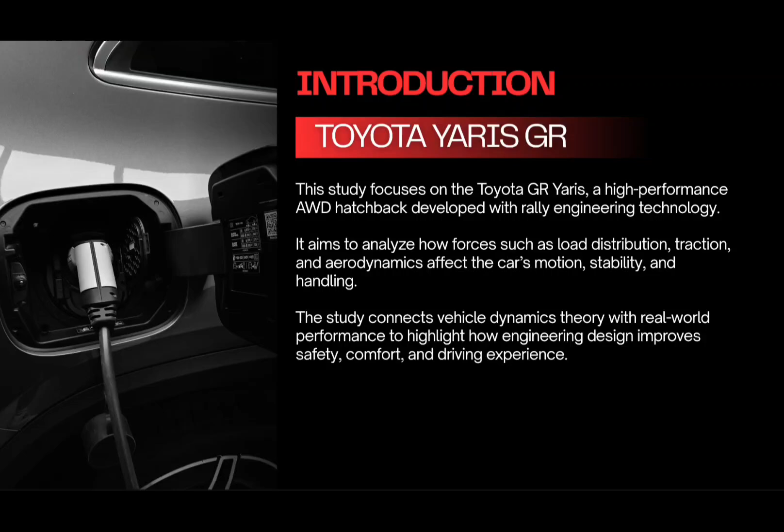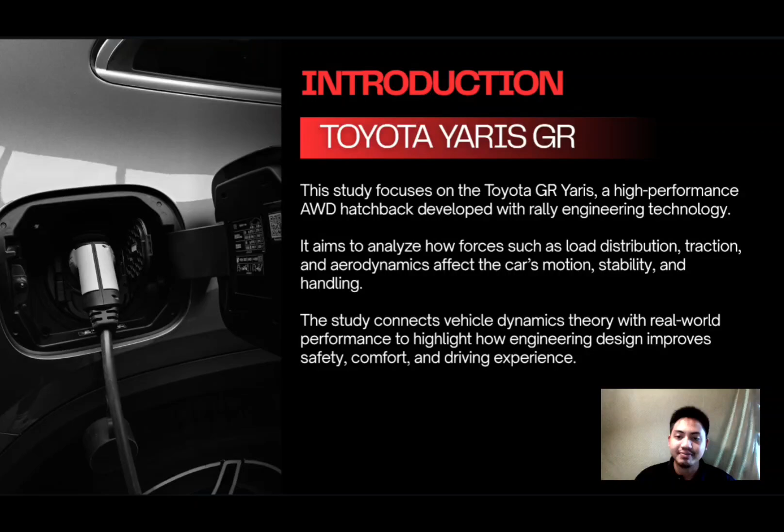For the Toyota GR Yaris, this study focuses on a high-performance all-wheel drive hatchback developed with rally engineering technology. It aims to analyze how forces, such as load distribution, traction, and aerodynamic effects, affect the car's motion, stability, and handling. The study connects vehicle dynamics theory with real-world performance to highlight how engineering design improves safety, comfort, and driving experience.

For discussion, during acceleration on a 4% uphill road, the rear axle carried more load due to weight transfer, while the front axle load slightly decreased. This improved traction at the rear axle, especially in the all-wheel drive Toyota GR Yaris, giving better grip and stability. AWD systems help maintain traction control and strong tractive force in lower gear. Aerodynamic body design reduces air drag and improves fuel efficiency. The GR Yaris uses a stiff suspension setup for better steering handling, but not for comfort. Also, Ackermann steering geometry indicates stable cornering with minimal understeer.

Overall, the Toyota GR Yaris shows a good balance of power, handling and stability, proving its design is well optimized for performance and control.

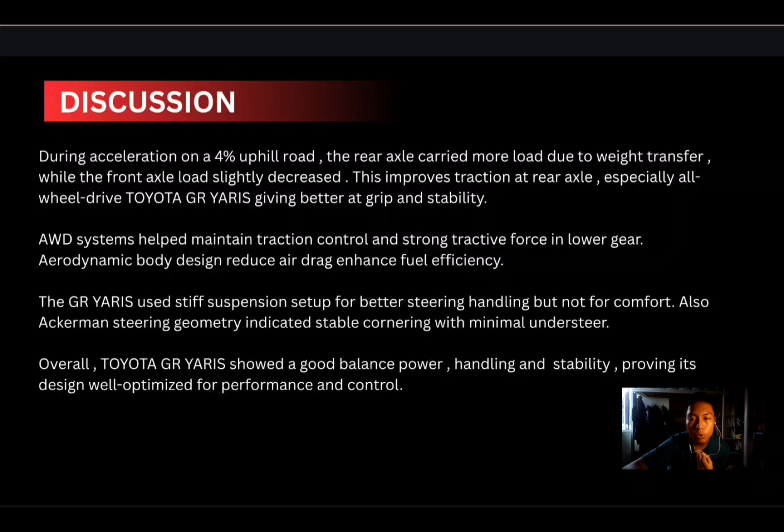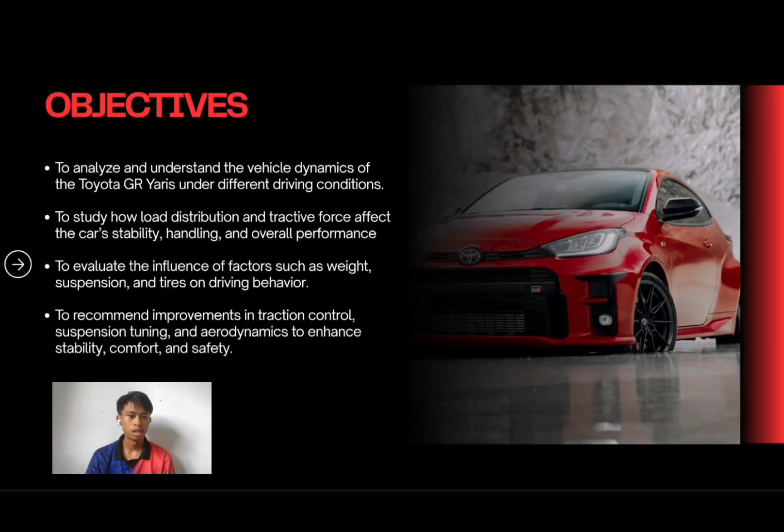For the objectives, the first one is to understand the vehicle dynamics of the Toyota GR Yaris under different driving conditions. The second one is to study how load distribution and tractive force affect the car's stability, handling, and overall performance. Third, to evaluate the influence of factors such as weight, suspension, and tire on driving behavior. And the last one, to recommend improvements in traction control, suspension tuning, and aerodynamics to enhance stability, comfort, and safety.

Okay, for the first question, we need to figure out the load distribution on the axles when the vehicle accelerates from a standing start on a 4% uphill road at 3.7 meters per second squared, assuming the CG height is 0.5 meter. For the calculation, change the weight from kg to newton by multiplying it with g, that is 9.81. For the front axle ratio and rear axle ratio, it is 59% to 41%.

Move on to how to get the front axle weight. Overall, 59% multiplied by the weight of the vehicle, that is 16,137.45 Newton, and the answer is 9,521.1 Newton for the weight of the front axle. For the rear axle, 41% multiplied by 16,137.45 Newton, and the answer is 6,616.35 Newton. That is the weight for the rear axle.

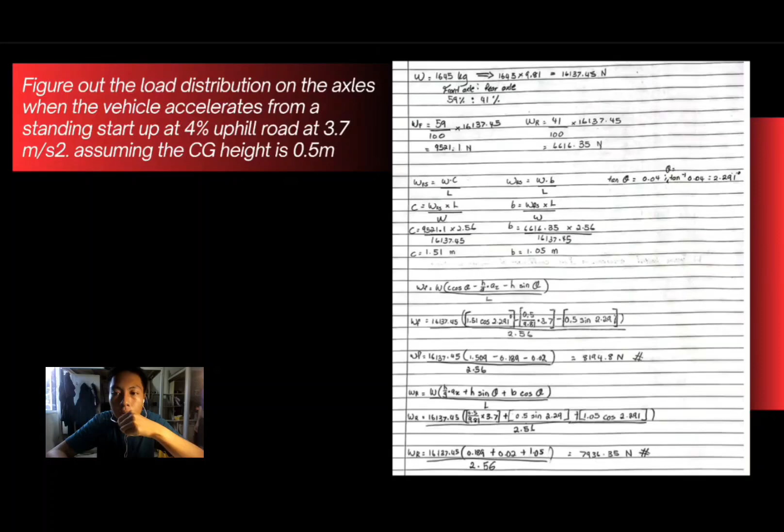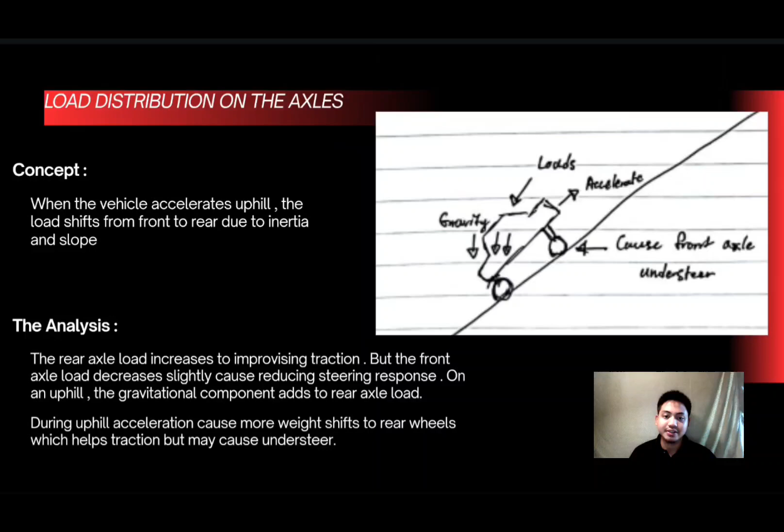For the load distribution on the axles, the concept is that when the vehicle accelerates uphill, the load shifts from front to rear due to inertia and slope. The analysis shows the rear axle load increases to improve traction, but the front axle load decreases slightly, reducing steering response on an uphill. The gravitational component adds to the rear axle load. It also causes more weight shift to the rear wheels during uphill acceleration, which helps traction but may cause understeer.

Okay, for the next question, determine the vehicle. Question A: first until fourth gear tractive force. Okay, now we start from calculation first. First of all, we use this formula to get first until fourth gear tractive force.

And now the question from the brochure already provides the TE number, that is 400. So we put it inside the formula. For first gear, we put 400 multiplied by 3.538, multiply 3.9, then multiply 0.9, and all of that divided by 0.317. The final result for first gear is 15,669.88 Newton.

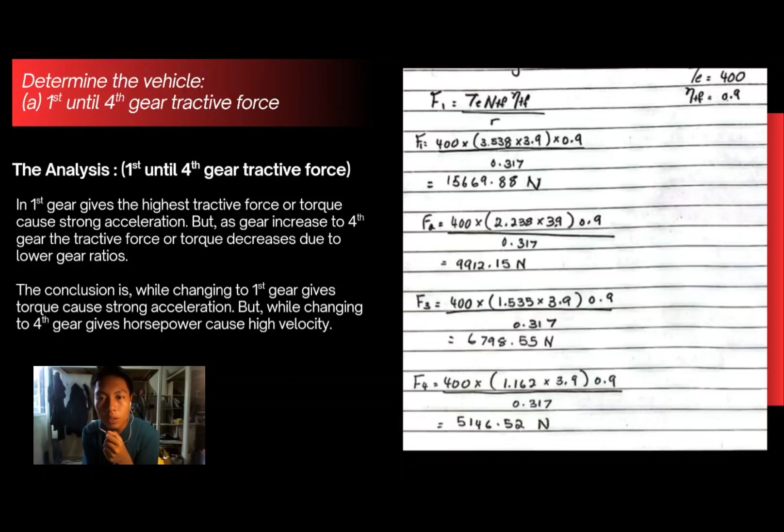Okay, for the analysis from first until fourth gear tractive force, first gear gives the highest tractive force or torque, for strong acceleration, but as gear increases to fourth gear, the tractive force or torque decreases due to lower gear ratios. The conclusion is that changing to first gear gives torque that causes strong acceleration, while changing to fourth gear gives horsepower that causes high velocity.

Okay, for the next question B, the threshold limit acceleration if the coefficient of friction is 0.62. Now we're going to the calculation first. For WF is 9,521.1 Newton. The CG is 0.5 meter and L is 2.56 meter. Now we're going to use the Fx max formula: 0.62 multiplied by 9,521.1, divided by 1 plus in bracket 0.52 multiplied by 0.62 divided by 2.56, and the final answer is

5,242.81 Newton. Okay, to get the acceleration, we're going to use Fx max equals m multiplied by acceleration. So we need to move m so Fx max is divided by m. So we calculate or find the answer for acceleration, that is Ax. Ax equals 5,242.81 divided by 1,645. So the final answer is 3.19 meter per second square.

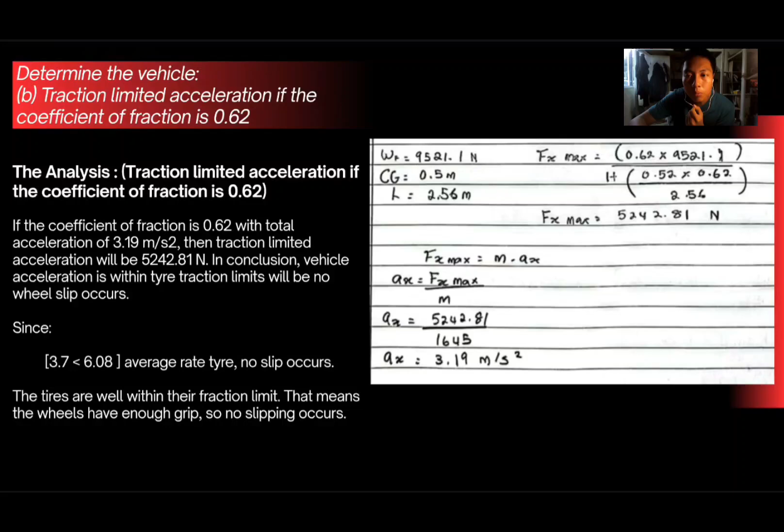Well, there are modifications to reduce aerodynamic drag and increase fuel economy, such as front bumper spoilers. Aerodynamic surface extending downward from the bumper to block and redirect the shear flow that impacts on the underbody components. It will contribute to drag and it also significantly reduces underbody drag. Low air drag means increased vehicle fuel economy.

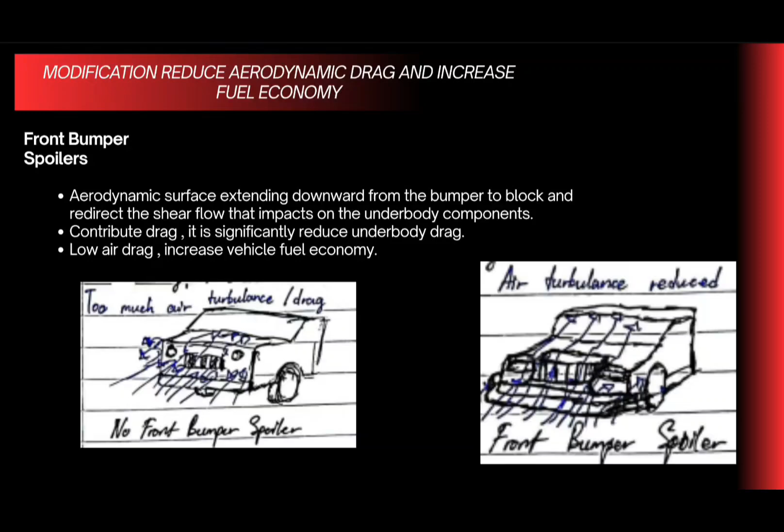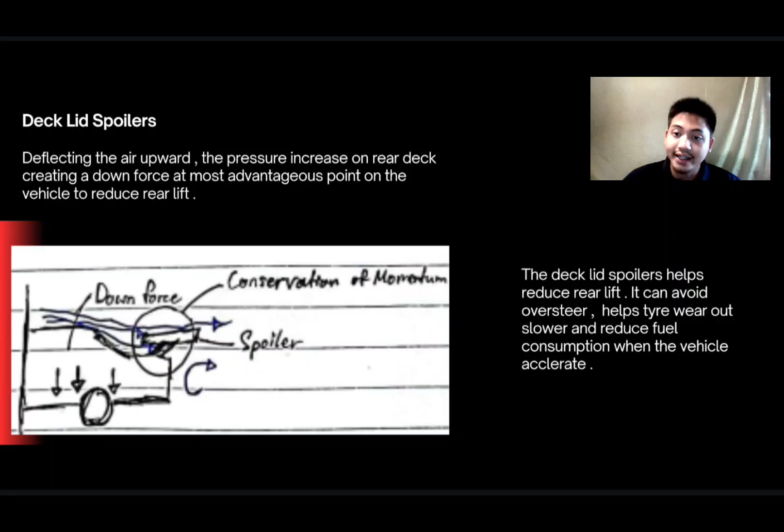Second one is deck lid spoilers. Deflecting the air upwards, the pressure increases on the rear deck, creating a downforce at the most advantageous point on the vehicle to reduce rear lift. The deck lid spoiler helps reduce rear lift. It also avoids oversteer and helps tires wear out slower and reduces fuel consumption while the vehicle accelerates.

For this task, we are required to use the tire data calculator from the BND tech source website to determine the tire stiffness. Then we calculate the suspension stiffness (Ks) using the formula K equals 4 pi square m. After that, we analyze the vehicle to find two main parameters: A, the front and rear axle ride rates, and B, the front and rear axles natural frequency in Hertz.

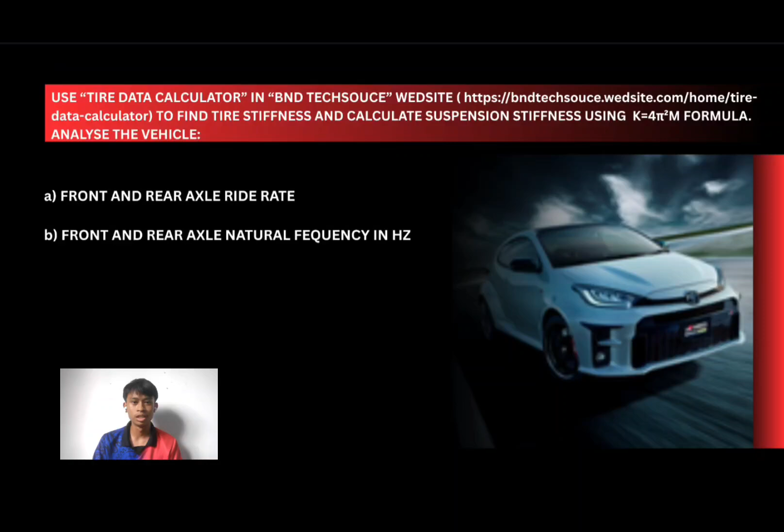First, we calculate the front and rear axle rates. The total weight for the vehicle is 1665 kg, and the tire stiffness Kt obtained from the website is 273,605.535 Newton per meter. The front axle supports 59% of the total weight, which equals 970.55 kg, while the rear axle supports 41%, which equals 674.45 kg.

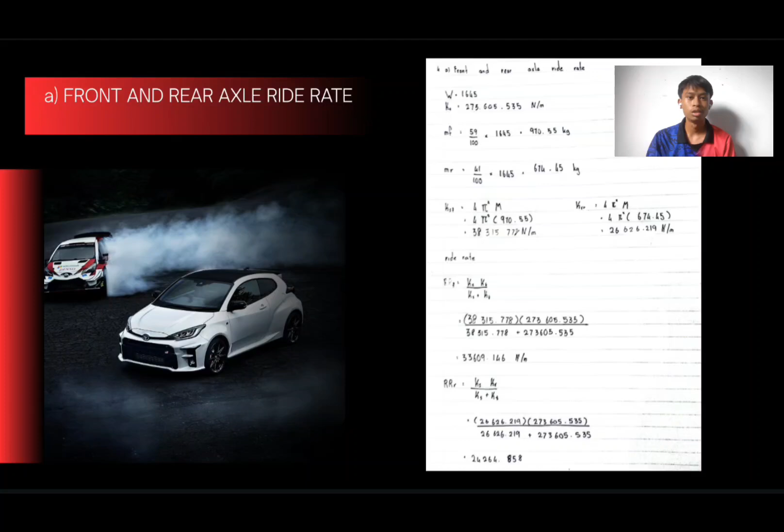Using the formula K equals 4 pi square m, we found the suspension stiffness for the front axle to be 38,315.772 Newton per meter, and for the rear axle 26,626.219 Newton per meter. Next, we calculate the ride rate using the formula RR equals Ks times Kt over Ks plus Kt. For the result, the ride rate for the front axle is 33,609.146 Newton per meter, and for the rear axle it is 24,264.85.

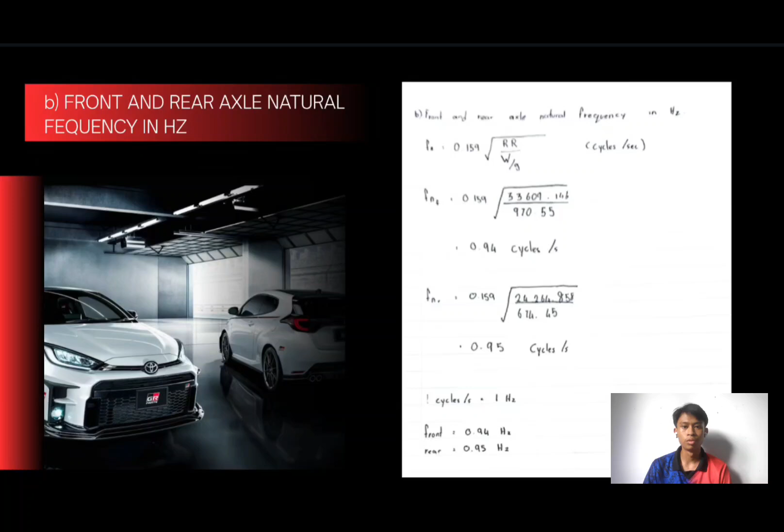Next, we determine the natural frequency for both front and rear axle. The formula used is Fn equals 0.159 square root of RR over mass, and the result for the front axle is 0.94 Hz and the rear axle is 0.95 Hz. Therefore, the natural frequency for the front axle is 0.94 Hz and the rear axle is 0.95 Hz. This value indicates that the suspension system provides good condition and stability for the vehicle.

For my part, I will present about the Ackermann geometry illustration for question 5.

So, the illustration of Ackermann steering geometry. This principle is fundamental to how cars and trucks turn smoothly without damaging their tires. When a vehicle turns a corner, it's actually tracing out a section of a circle. The challenge is that the inner wheel and the outer wheel travel along circles of different size.

The goal of perfect steering is simple. Every single wheel on the car, front and back, must pivot around a single common point. We call this the instantaneous center of rotation, or simply point O. If all four axles extended out meet at this single point O, the car is turning perfectly and no tire is grabbing or sliding sideways.

Besides that, if we turn both front wheels at the same angle, like a wagon cart, they will not both point directly at O and the tire will slide. This is where the magic of Ackermann geometry comes in. To ensure both wheels point at the common center O, we must steer them at different angles. The inner wheel, closer to the turn, uses the larger angle, which we call delta I. It has to turn sharper. The outer wheel, further from the turn, uses the smaller angle, delta O.

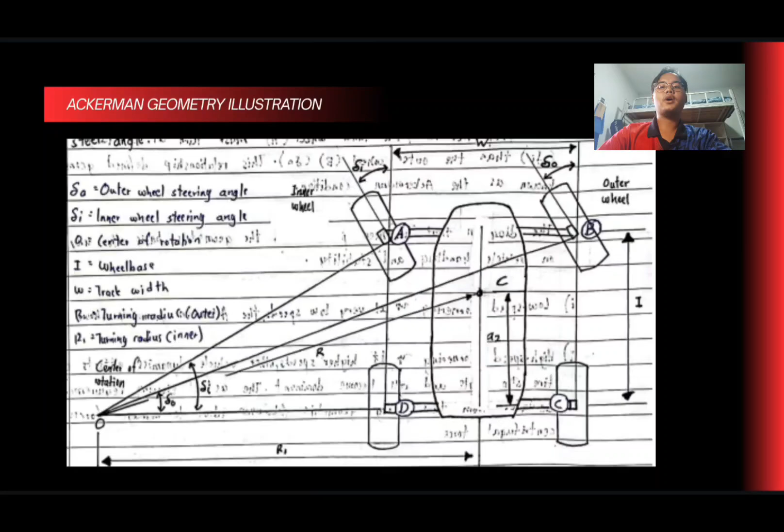In summary, Ackermann steering makes the inner wheel turn sharper than the outer wheel, guaranteeing that the entire vehicle pivots cleanly around a single point, resulting in smooth, efficient, and low tire wear turns. Next is the diagram that provides the geometry basics on vehicle handling and stability. As we all know, at very low speed, the Ackermann geometry shown is ideal. For high-speed cornering, the tire slip angle and roll become dominant. Understeer and oversteer will occur due to the tire force, determined by its handling characteristic.

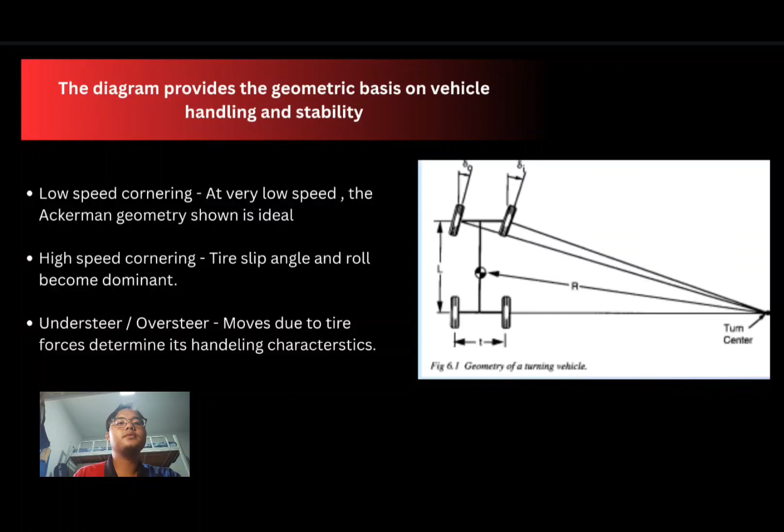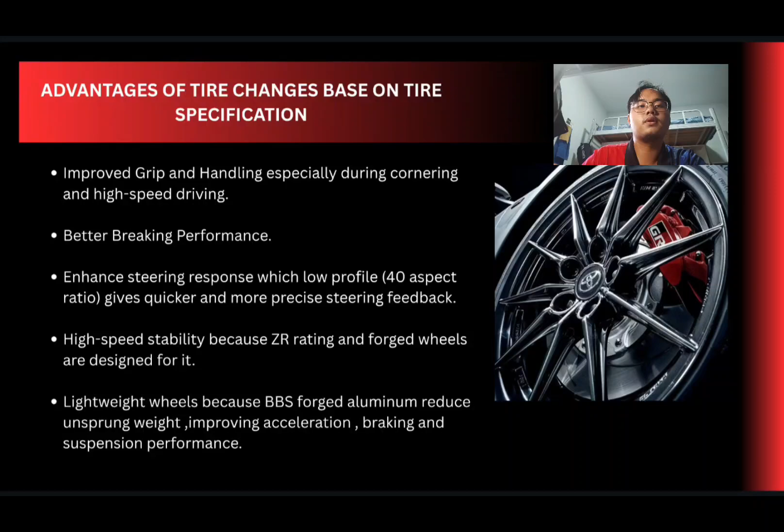For question 6, that is the advantages of tire changes based on tire specification. First of all, it will improve grip and handling, especially during cornering and high-speed driving. It will also give better braking performance. Besides that, it will enhance steering response, as the low profile, known as 40 aspect ratio, will give quicker and more precise steering feedback. It will also have high-speed stability because of the ZR rating and forged wheels are designed for it. Last but not least, it has lightweight wheels because BBS forged aluminum reduces unsprung weight, improving acceleration, braking and suspension performance.

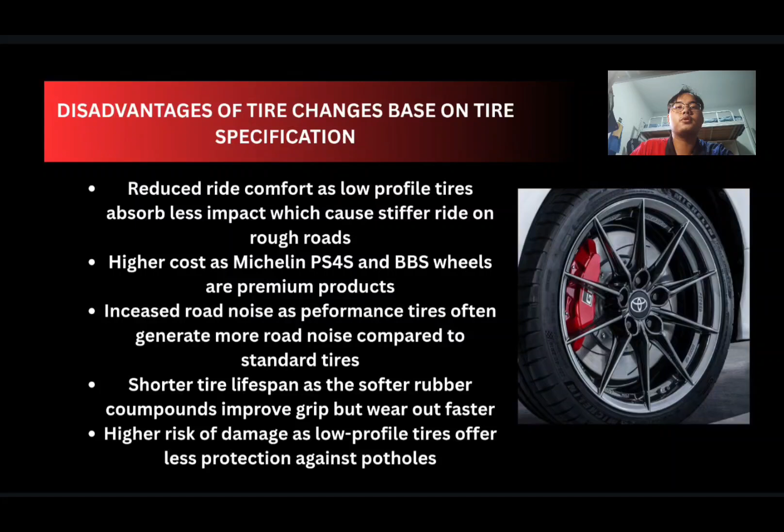Next is the disadvantages of tire change based on tire specification. To start with, it will reduce ride comfort as low profile tires absorb less impact, which causes a stiffer ride on rough roads. Next, it will have a higher cost as Michelin PS4S and BBS wheels are premium products. It will also increase road noise as performance tires often generate more road noise compared to the standard one. Also, the tire will have a shorter lifespan as the softer rubber compounds improve grip but wear out too fast. Last but not least, it has a higher risk of damage as a low profile tire offers less protection against potholes.

In conclusion, the Toyota GR Yaris demonstrates Toyota's ability to combine racing technology with modern road engineering. With its powerful engine, all-wheel drive, which is AWD system, and aerodynamic design, the GR Yaris delivers outstanding performance and precise handling. It is not just a sports car, but a symbol of Toyota's innovation in creating a vehicle that provides dynamics, balance, and a thrilling driving experience in all road conditions.